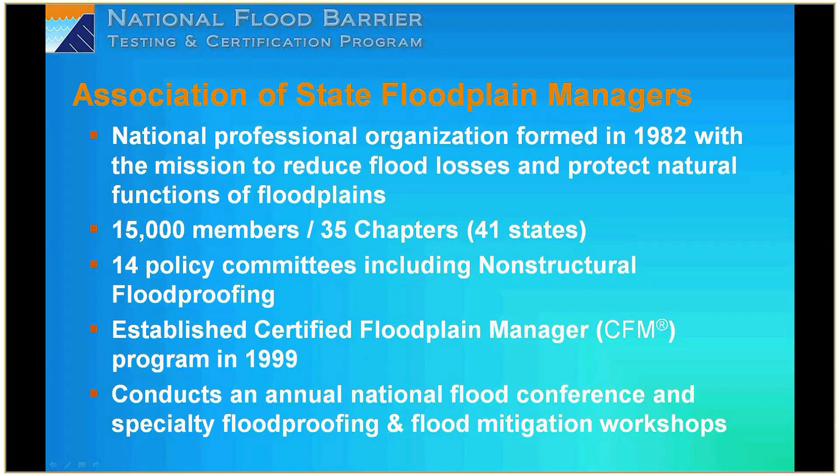It was at one of these specialty floodproofing workshops that the National Flood Barrier Testing and Certification Program really got initiated. After a conference in 2002, there was interest in testing programs because there was a need to ensure quality products were being developed and to differentiate the ones that work from the ones that don't. People were really feeling the need for that.

At the time, Larry Buss was the U.S. Army Corps of Engineers lead, and in conjunction with several other staff at the Corps, they developed the water testing standards based on the BSI Kitemark. The Corps funded testing for several flood fighting products in 2004, and that's where the facilities got established, with testing facilities in Vicksburg established for these products.

FM Approvals created a standard, 2510, which established the standard for doing this testing of these products. Then ASFPM and the Corps of Engineers began to partner with FM Approvals in 2010 to develop this national program for testing and certification. It actually got launched in 2012, so it's been in effect now for 2 years.

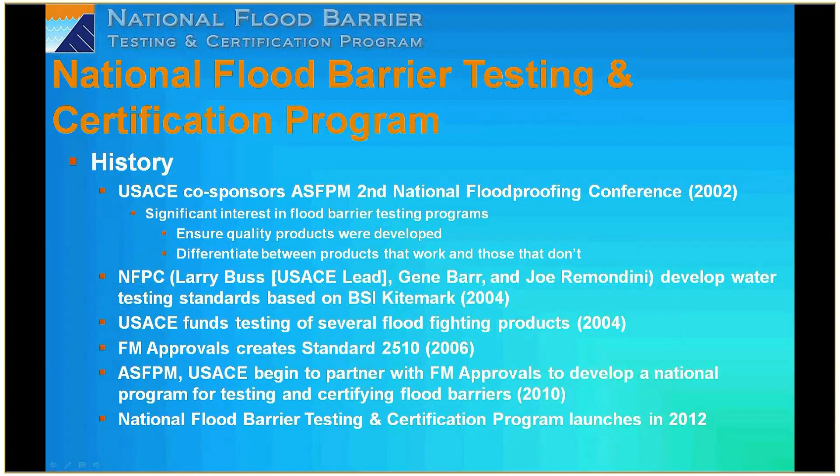The basic components of the program: it's a partnership between our three entities, the ASFPM, the Corps of Engineers, and FM Approvals, and it's a dual recognition system. FM Approvals has their approval process and certification process, and then there's this national program recognition, so it provides a two-pronged recognition for these products.

The requirements are basically water-based testing that's done generally at the Corps of Engineers facilities in Vicksburg, component and material testing, and then initial and surveillance audits of the materials at their manufacturing site, after which FM approval is issued. There are 3 levels of certification: silver, gold, and platinum, related to the amount of hydrostatic water depth that they've been tested and withstood—either 1, 2, or 3 feet for each of those 3 levels.

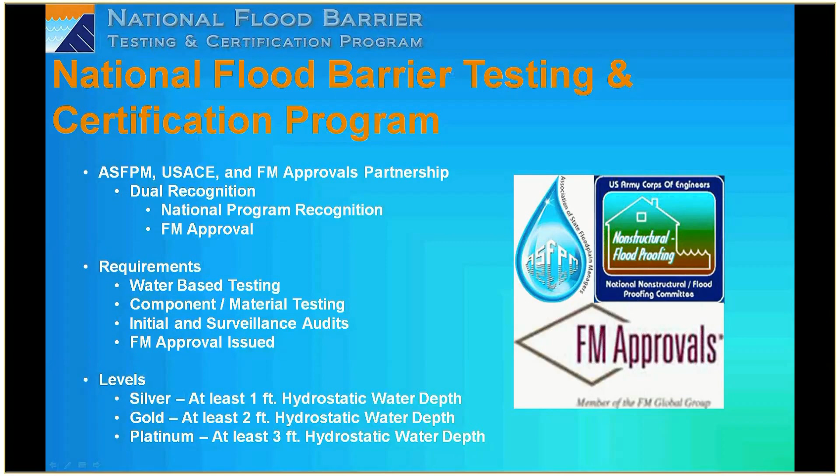The program is set up so that ASFPM is the program coordinator, with many of our members primarily interested in this certification process and in seeing that these products have been tested. So we are the overall program coordinator, and the water-based testing for perimeter barriers is conducted generally at the U.S. Army Corps of Engineers facility, the Engineering Research Development Center in Vicksburg, Mississippi. Opening barriers are evaluated at the manufacturer's facility, at an ERDC facility, or at an alternative test laboratory. All testing must be witnessed by FM Approvals, and the material component testing is specifically conducted by FM Approvals, who also perform a facility audit and annual surveillance auditing where the products are manufactured to verify the quality control conducted there.

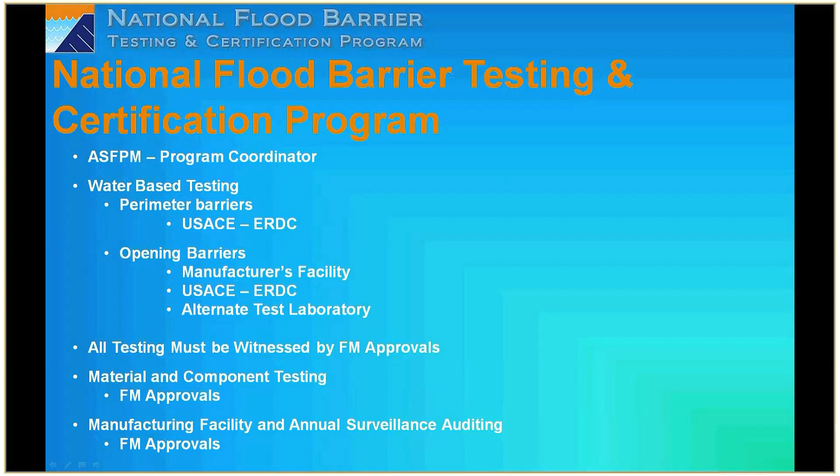This is Brian McDonald, and let me tell you a little bit about who FM Approvals is.

FM Approvals is a business unit of FM Global, which was founded in 1835 and is now one of the world's largest business property insurance organizations. It has over 100,000 insured locations in over 130 countries around the world. FM Global has over 5,000 employees, of which about 1,800 are specific loss prevention engineers.

Now, what makes FM Global unique is their philosophy that a majority of all losses are preventable. You shouldn't have to recover from a loss. You should just be able to prevent it in the first place. And that's what those 1,800 loss prevention engineers help to do.

They perform regularly scheduled site inspections of all of FM Global's insured facilities around the world, and they identify loss exposures. These exposures can be in the form of fire, wind, or flooding hazards. They then recommend solutions to help mitigate or even eliminate that risk, and they often do this by recommending the use of FM-approved loss prevention products.

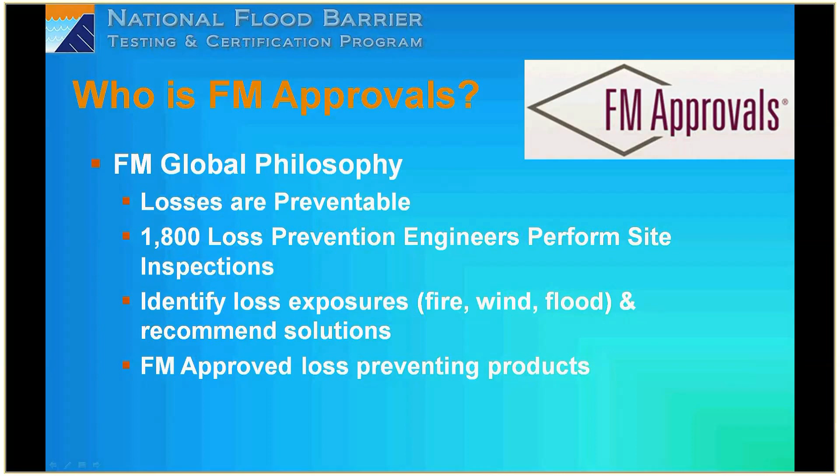FM Global publishes advice in the form of property loss prevention data sheets. These are essentially engineering guidelines that detail how to best protect a facility against various different types of hazards. The data sheet that applies to flood is 1-40.

Some advice included in this data sheet is, number one, don't build in a flood zone. Avoid it if at all possible. But even beyond that, you must ensure that the infrastructure supporting the facility is secure. If supply lines are cut off, for example, due to a flood, that will create a business interruption, which is a significant issue.

Elevate everything. Elevate the building, elevate electrical equipment, communications equipment, data processing equipment, critical storage items, lift it up.

Also, have a documented FERP, a flood emergency response plan, that details what everyone's responsibilities are in the event of an emergency. But it's not enough just to have a FERP. Periodic training with the plan must be conducted to ensure everyone stays familiar with their responsibilities.

And another piece of advice taken from this data sheet: use FM-approved flood mitigation products.

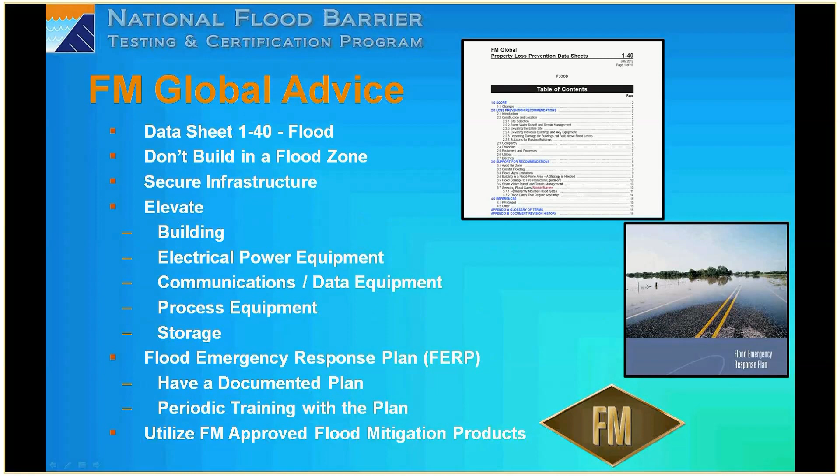Now, FM Approvals was founded in 1886 with the primary purpose of supporting FM Global by testing and certifying loss prevention products. They're headquartered in the U.S. with 10 additional offices located outside of North America.

FM Approvals has over 200 published product testing standards, all of which can be downloaded free of charge at our website, fmapprovals.com.

The standard that applies to flood is our Class 2510 approval standard. And we're very pleased to let you know that this standard was recently adopted by the American National Standards Institute, so it's now ANSI FM 2510.

The requirements of the National Flood Barrier Testing and Certification Program mirror the requirements found in the 2510 standard. So a manufacturer who satisfies the requirements of 2510 can obtain dual recognition. They can be recognized under the national program and also obtain certification in the form of FM approval.

The program covers temporary barriers, which are typically set up away from a building. They're fully deployed when there's a flood warning and completely disassembled and stowed away after the event.

It also covers opening barriers, also known as closure devices, which protect openings in a building, such as doors, windows, or vents.

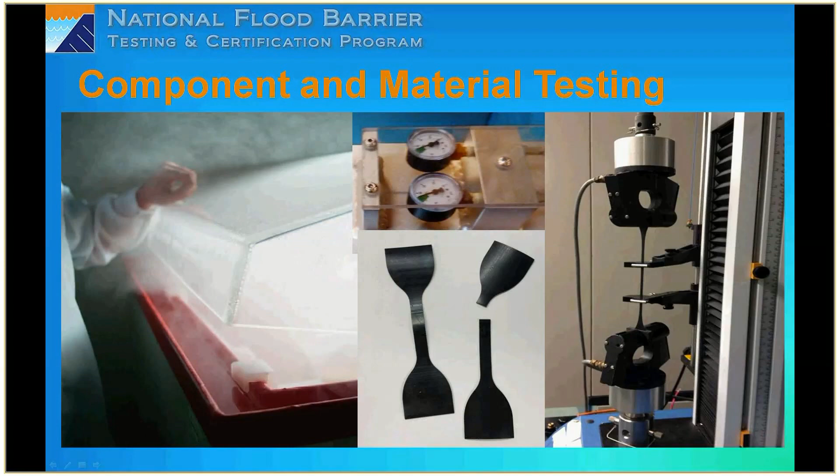Pressure retaining components are subject to hydrostatic strength and leakage testing. Movement parts could be subject to durability cycle type of testing. Gaskets are subject to tensile and compression tests. Certain materials are subject to abrasion resistance. We conducted different types of environmental and corrosion testing, all to ensure that no one component is going to break down and compromise the entire system.

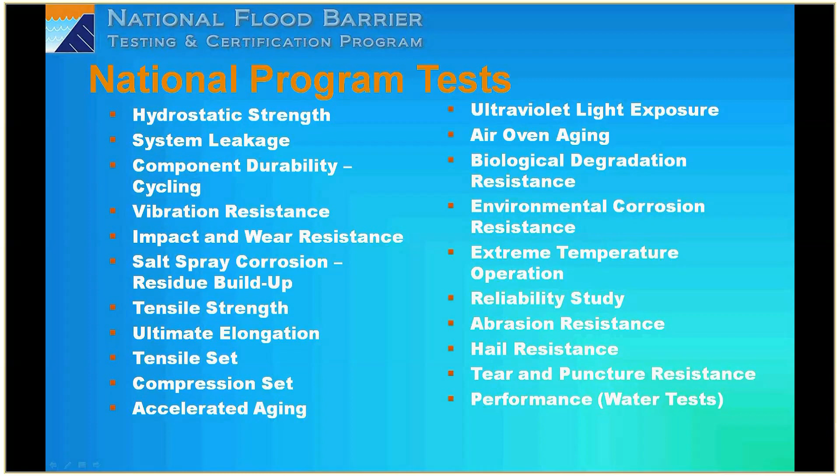Auditing is another critical aspect of the program. We're going to conduct an initial audit of the manufacturing facility to ensure they have the proper quality procedures in place to prove that they are capable of reproducing a product identical to the one we're testing and certifying.

We're then going to enroll that manufacturer in a follow-up surveillance audit program. We're going to make regularly scheduled periodic visits to the manufacturing facility where we'll review the product and the critical documents and ensure nothing has changed, and they're still manufacturing a product identical to the one we tested and certified.

Any changes must be reviewed and approved in advance. Design changes may require additional testing to prove that it hasn't impacted performance.

The water-based performance testing is primarily conducted at the Engineer Research and Development Center in Vicksburg, Mississippi, by the U.S. Army Corps of Engineers under the direction of Donald Ward.

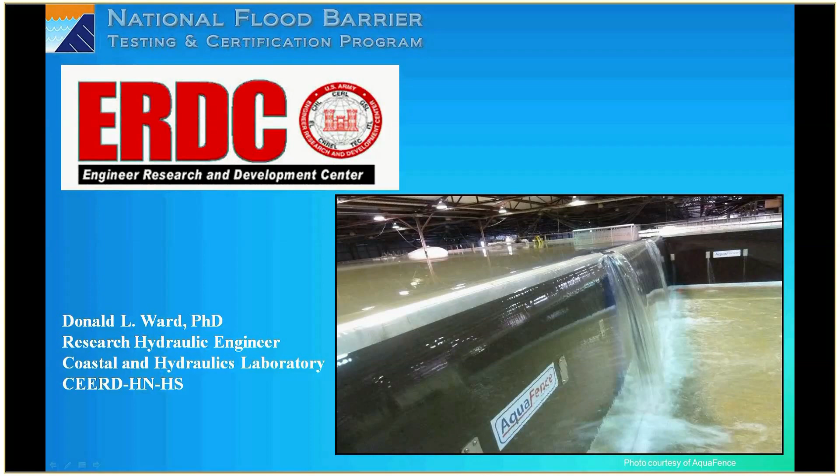The Engineer Research Development Center testing is based on the protocol for evaluation of expedient flood fight structures, where hydrostatic tests are performed using a static water level, varying the depth of that water on the structure.

We also look at hydrodynamic tests, where we form waves: small waves 2 to 3 inches in height, medium-sized waves 6 to 8 inches in height, or large waves 10 to 12 inches in height.

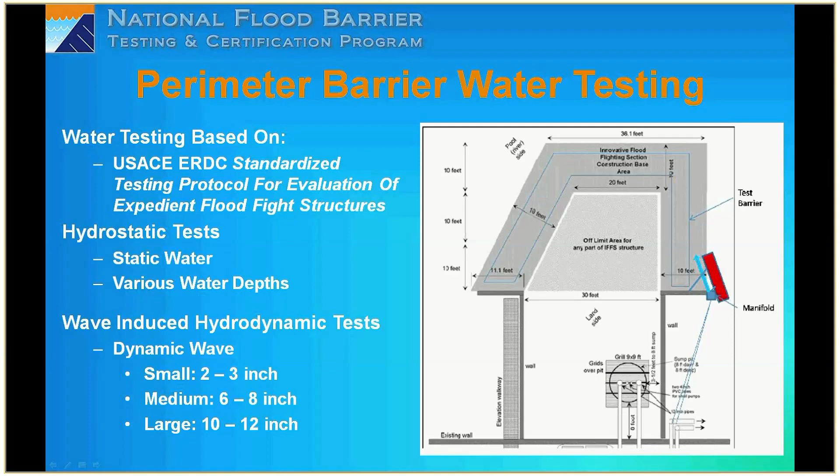Additional information on the perimeter barrier water testing is that we also look at overtopping of that barrier, and we perform this for 1 hour with at least 1 inch of overtopping occurring.

Then we also look at impact testing, where we take a 12-inch diameter log weighing about 610 pounds and move it directly at the perimeter barrier at 7 feet per second. After that testing, we increase the size of that log to 17 inches, about 790 pounds, and again use a speed of about 7 feet per second to strike that perimeter barrier.

We also run a current or velocity test for 1 hour, with a maximum rated height of water plus 1 inch, moving that velocity at the perimeter barrier at 7 feet per second to see if there's any deflection or seepage in that barrier.

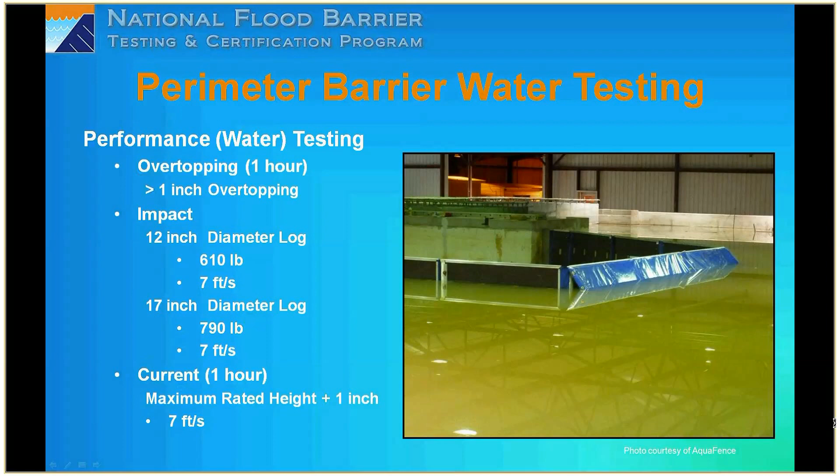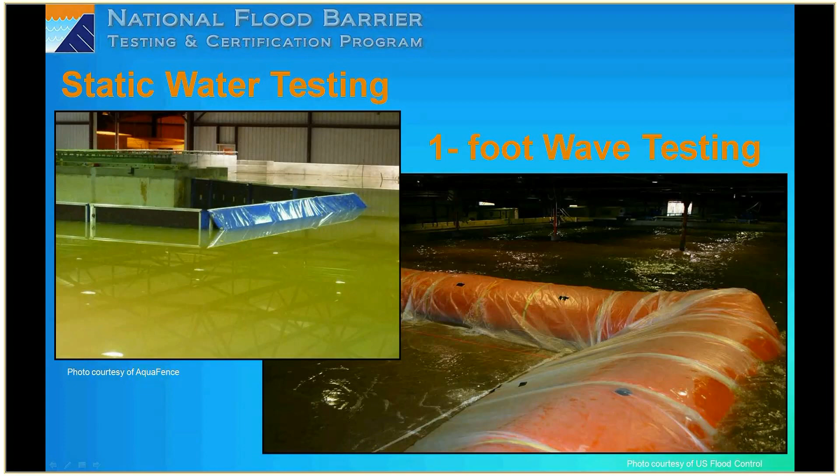On the static water testing, we have 2 photos here of the water placed up onto the structure itself, and then again we do the wave testing. The photo in the lower right is of a 1-foot wave being thrown at a perimeter barrier.

This is a video of the 12-inch wave testing.

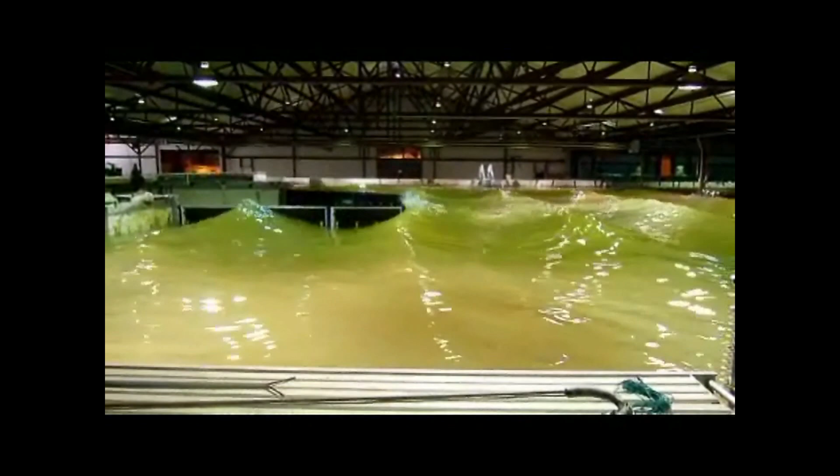We also perform the overtopping test. Here you can see one of the products with the static water elevation brought to the height of that structure plus 1 inch, and we overtop that barrier for an hour to see if it maintains its performance.

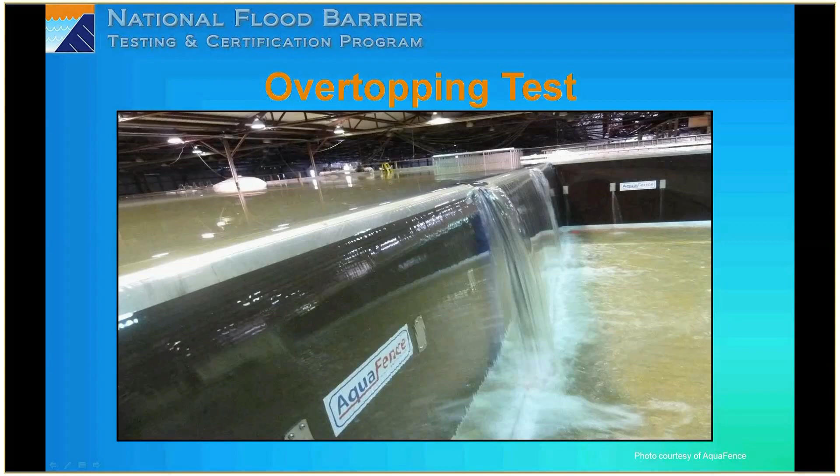On the opening barrier hydrostatic load test, the barrier is put in place, filled with water, and we look for seepage on that barrier to see how well it performs. Then it is taken apart and placed back together.

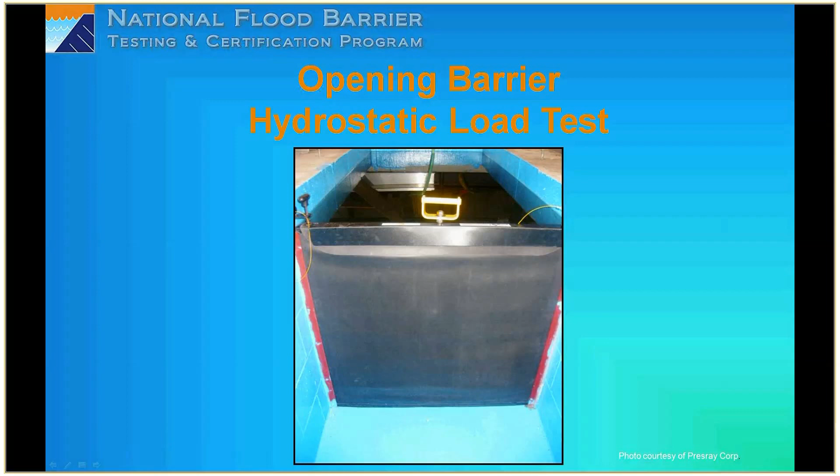We then move into a dynamic impact load test on these opening or closure barriers, where we strike the structure itself at about 80% of the height of that structure, towards the center of it, and see how well that performs.

We will again strike the closure very close to the sill, take the structure down, redeploy it, fill the basin again with water, and see how well it has handled these impact load tests.

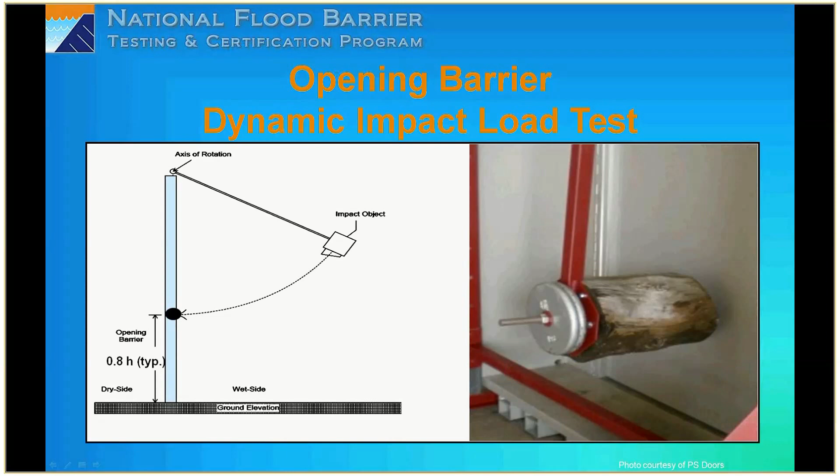Our next slide here should have a series of photos showing that impact load testing occurring.

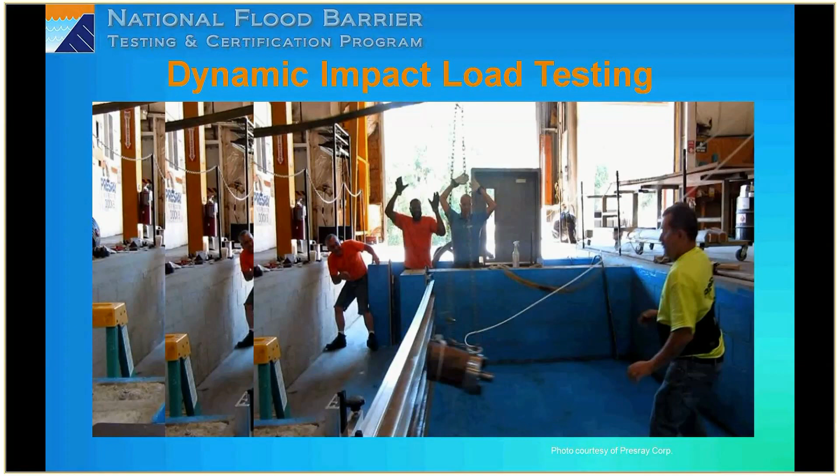I'd now like to spend some time illustrating the value that the testing and certification under this program brings. Without testing, it's very difficult to determine if a product's going to work properly.

Here are 2 very similar looking flood barriers, and if you were able to inspect them, you'd see that they are both solid construction, secure, with seemingly good gasket material. You may think that either one will provide adequate protection.

However, we tested them both, and the one on the right passed, but the one on the left failed with a leakage rate of 7.5 gallons per hour, which is 6 gallons over our requirement for this particular barrier.

Our seepage rate criteria for this type of barrier is 0.08 gallons per hour per linear foot, and this is a 12-foot barrier being tested against 3 feet of water. So the linear footage is 3 feet here, plus 12 feet here, plus another 3 feet here, for a total of 18 feet.

Multiplying that by the 0.08 criteria gives an acceptable leakage rate of 1.5 gallons per hour. The good news is that this manufacturer made some design changes, retested, and then achieved passing results and got certified under the program.

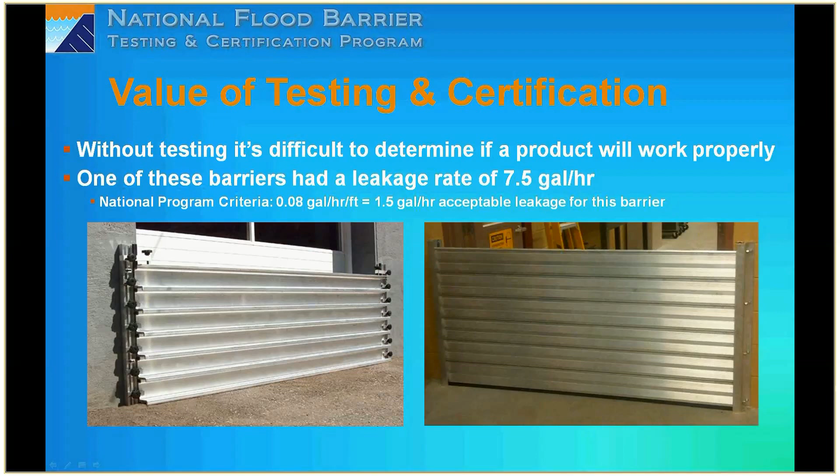Component and material testing is very important as well. Here are the results of an abrasion test conducted on material samples from 3 different bladder tube type barriers. For this test, an abrasion wheel is passed back and forth across the sample 3,000 times, and it can't break through the material.

The top 2 passed, the bottom 1 failed. Now these tube-type barriers get dragged across various different types of terrain. They get stepped on, they get beat up during the deployment process, and they need to be able to withstand a certain degree of abrasion.

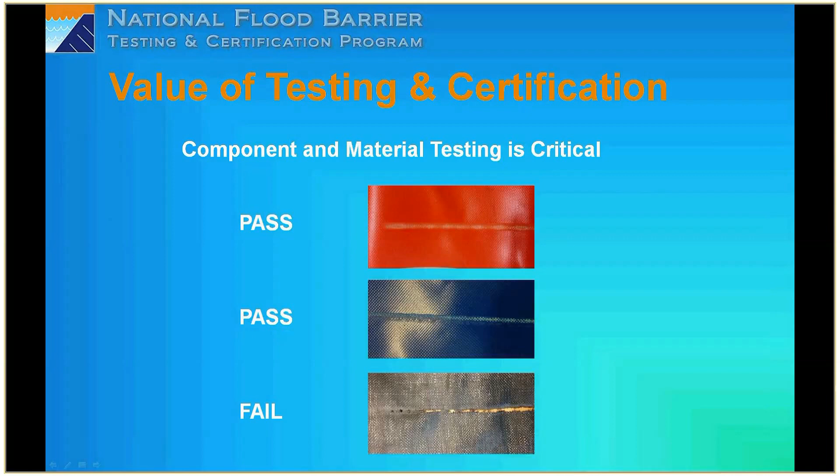Now testing is important, but it doesn't stop there. If a barrier isn't installed properly, it's not going to do what it's designed to do. And flood barriers are often installed by local contractors who don't really have an understanding of how flood products are intended to operate. Over the next several slides, I'm going to show examples in which barriers were improperly installed by local contractors. I'll also call attention to some additional requirements of the National Flood Barrier Testing and Certification Program that will help alleviate these concerns.

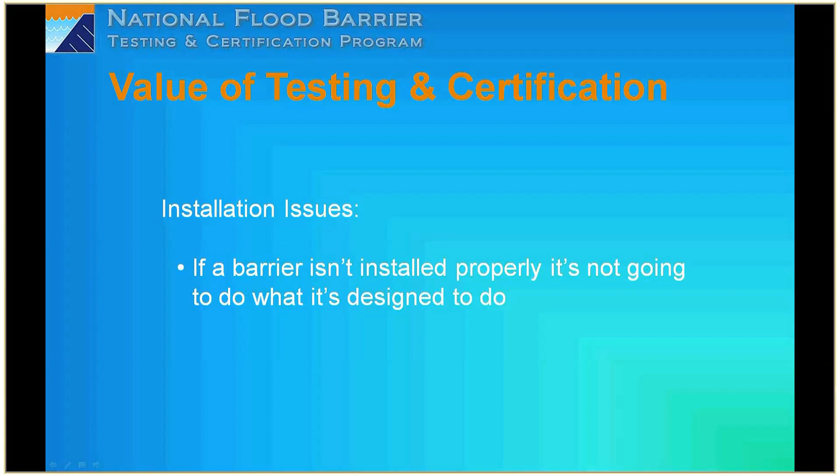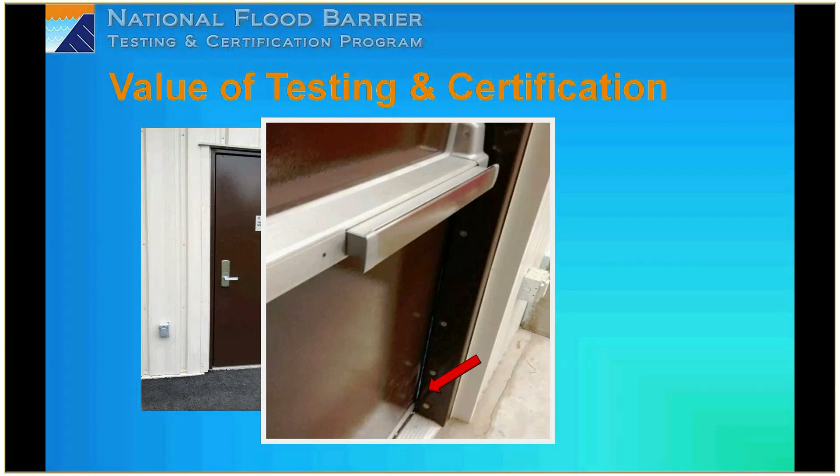Here's an installed flood door, and at a glance from the outside, everything looks fine. However, if you were to look from the inside of the door, along the bottom, you can see daylight. And if you can see daylight shining through, you can be sure that water is going to come through.

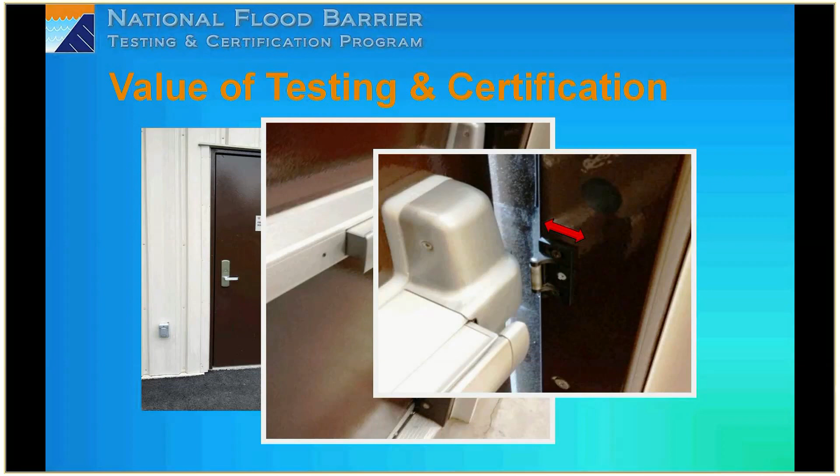Now, it turns out that the contractor didn't install the strike plate in accordance with the drawings, and the latch doesn't allow the door to be pulled tight against the seal.

Here's another similar example to the one on the previous slide. Again, a flood door installed by a local contractor who didn't follow the provided drawings and instructions. The strike plate wasn't installed properly, nor was the sweep on the bottom of the door. Both played a role in why this door didn't have a good seal.

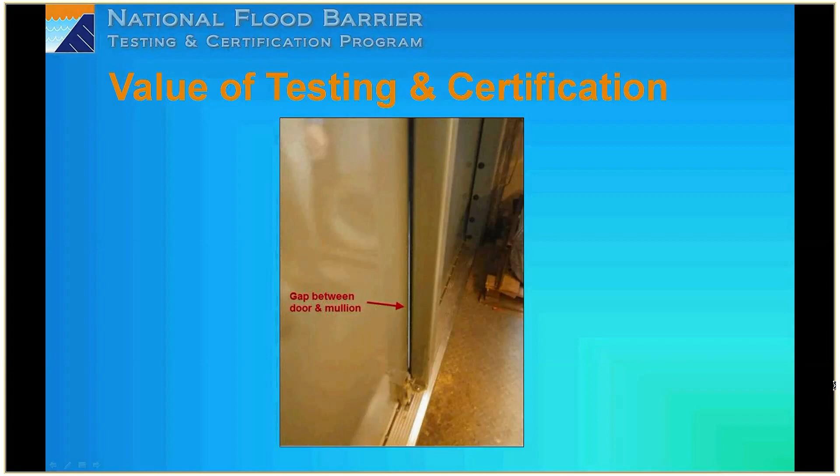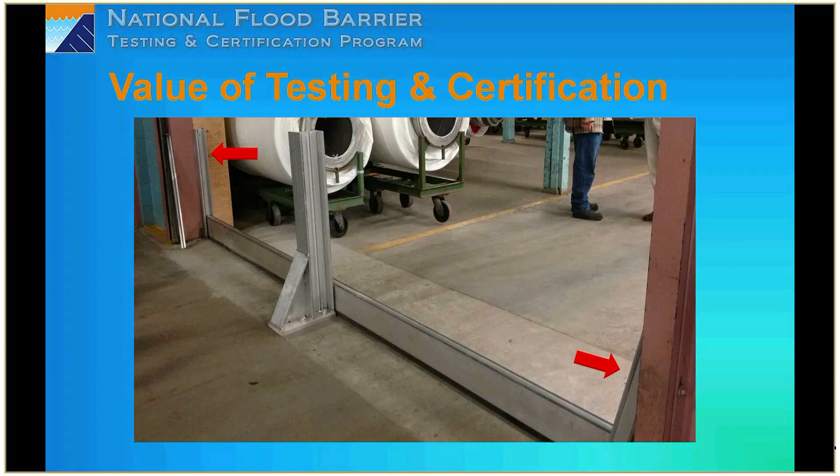The next thing we notice is one of the gaskets is torn. These gaskets are the most critical features of the flood barrier. They need to be regularly inspected and properly maintained.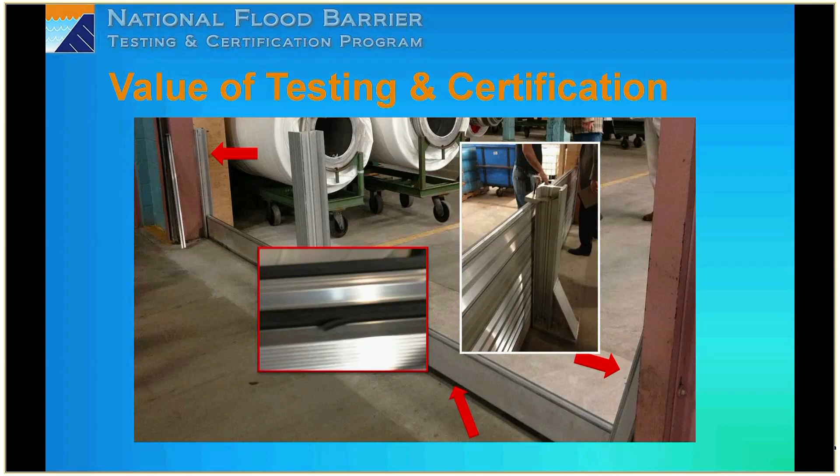Now the flood barrier is then installed to completion and everything may look fine, but looking at the picture on the left, you'll see that these planks have a textured face and a non-textured face. This non-textured face goes towards that vertical gasket, and that creates the seal. This top plank is installed backwards.

Now this does two things. First, it creates a potential leakage path right here. And then it's also going to damage that vertical gasket as it's slid into place.

Additionally, looking at the planks on the right, these planks must be the proper length and also must be positioned correctly within the channels. You can see that this top plank isn't even making contact with that vertical gasket.

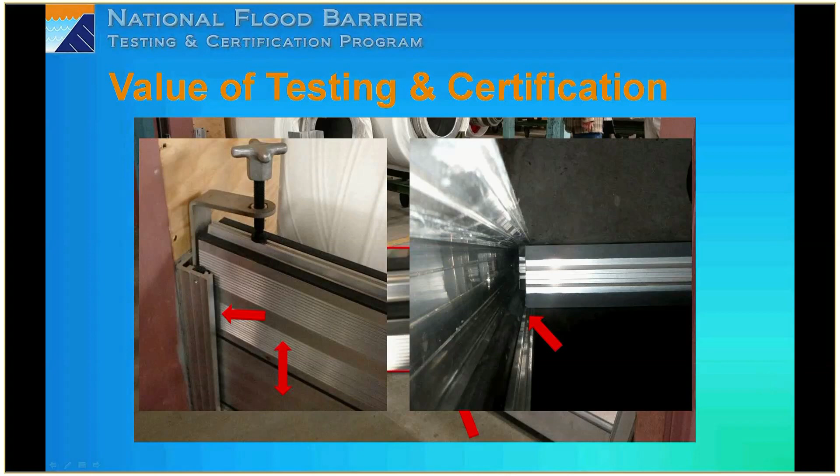Certification under the national program can help alleviate these issues because it requires manufacturers to produce two critical pieces of documentation. The first is a design, installation, operation, and maintenance manual, which does just what it says, provides details on how to properly install, operate, and maintain the barrier, with additional guidance on how to repair or replace components as needed.

The second is a post-installation acceptance checklist. This is a checklist that must be completed and signed off by whoever is installing the barrier. It indicates that they have inspected critical aspects of the installation, and a copy of the completed checklist is then sent back to the manufacturer's facility where it must be kept on file.

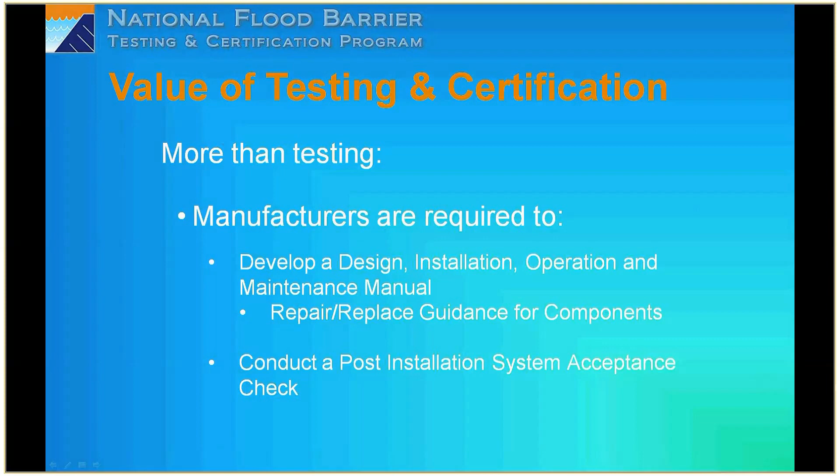FM Approvals has issued a bulletin to all of our auditors worldwide calling attention to the post-installation checklist requirement. During the manufacturer's routine surveillance audit, the auditors will be verifying that a completed checklist is on file for all installed certified barriers.

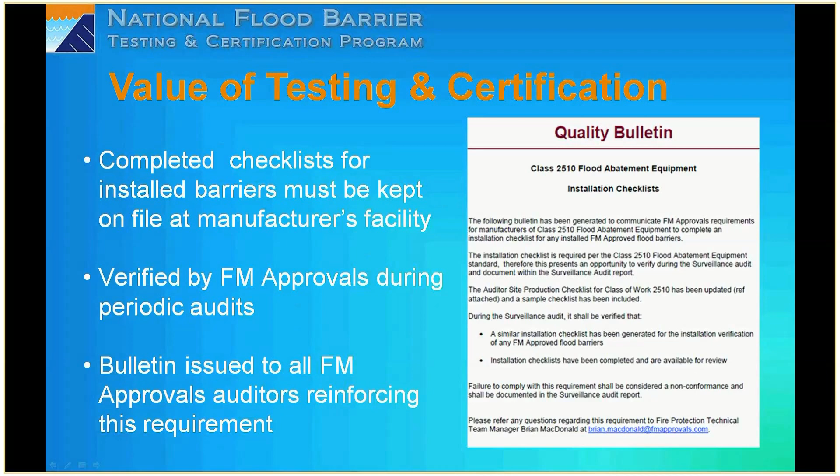This is Alan Luloff again, and I'd like to highlight that the major challenge we're facing is a high demand for reliable flood mitigation solutions. Floods aren't reducing in frequency; they're getting more common, so the demand is there for these types of solutions. The opportunity is that now, with this program, manufacturers have a means to obtain unbiased third-party certification through the National Flood Barrier Testing and Certification Program.

As you can see, it's a rigorous testing protocol, and it identifies the major benefit: manufacturers can prove that their products are quality products that meet the standards of this program.

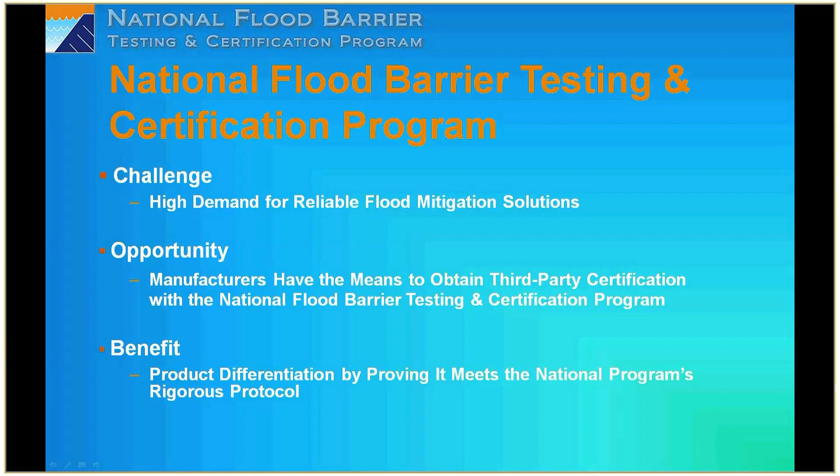Again, it's a partnership of our three entities: the U.S. Army Corps of Engineers, ASFPM, and FM Approvals. We have created a website that provides information on the program, found at www.nationalfloodbarrier.org. If you go to that site, you'll see the basic components of the program: introduction, overview, roles and procedures, and product categories.

You can see the product categories that have been established to date are for temporary barriers and closure devices. In addition, on the website, you can go to the temporary flood barrier products page and identify those components that have been tested and certified under this program.

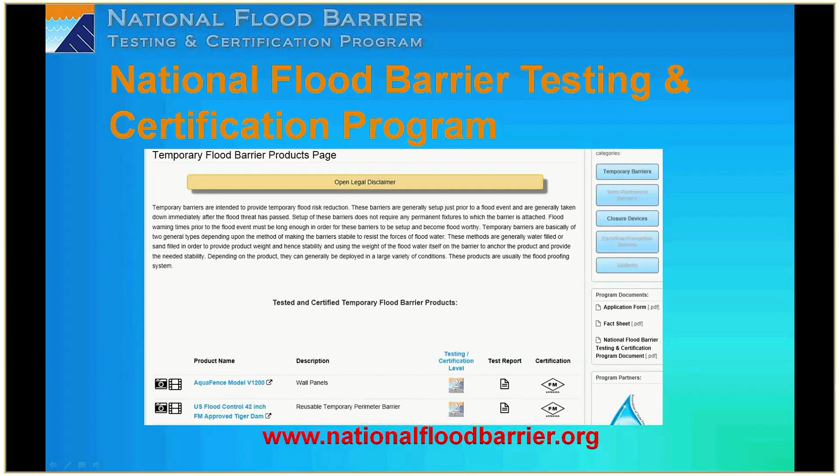So you can see here, AquaFence is an approved product, and U.S. Flood Control's 42-inch Tiger Dam is an approved product also. You can see the two major products that are listed on this page at the moment.

So the AquaFence is one of the manufacturers that has a device approved. You can see the installation at the facility, the type of device it is, set up—this is actually in the state of New York, I believe, constructed to protect this facility here. You can see that the type of barriers certified under this program varies.

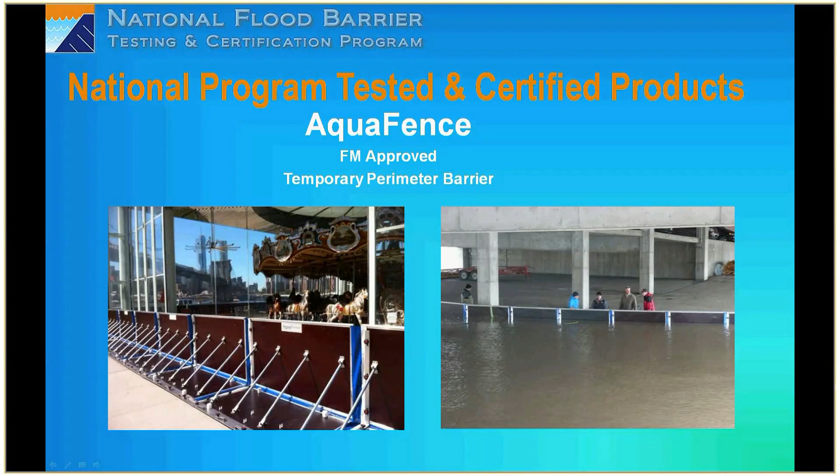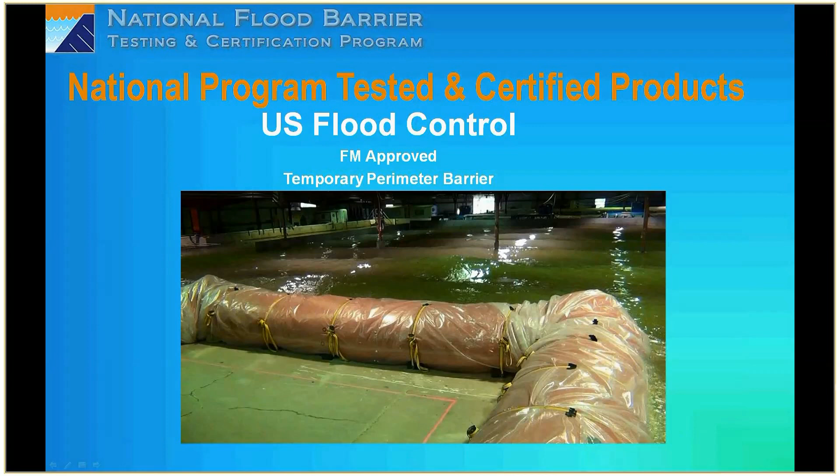Another barrier is the U.S. Flood Control, or Tiger Dam. Again, you can see the types of products vary, but they've all gone through the same protocols and testing requirements. So even though these two devices are very different, they both met the standards under this program.

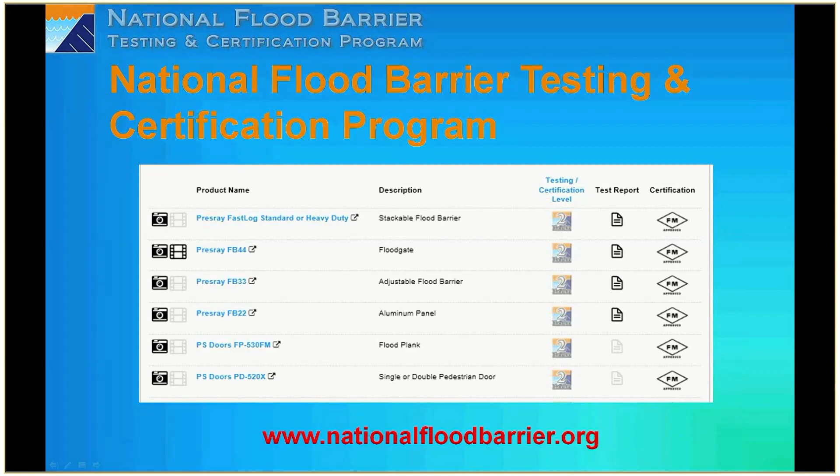So again, here's a listing of the programs. This is now the closure devices that have been approved, and there are two primary manufacturers that have their devices approved: that's Presray and PS Doors. You can also click here and get the actual test reports and the certification that's been approved.

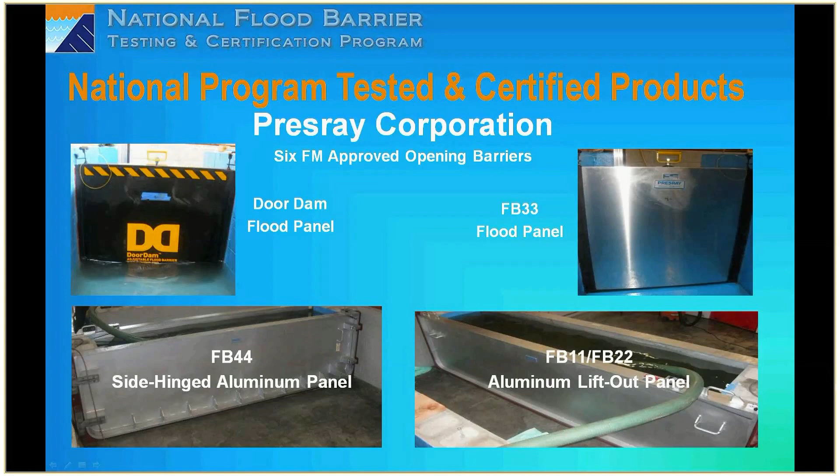There's Presray, with 6 approved barriers. And here's photos of the types of devices that have been tested and approved under this program for Presray Corporation.

Again, these are really valuable installations for structures that cannot be located out of the floodplain. These are kind of on-site flood-proofing devices that can be used.

We're really appreciative of the efforts by FM Approvals and the Corps of Engineers to work with us to get this program implemented. We think it's a great value to the people dealing with flood issues in the United States. So thank you very much.